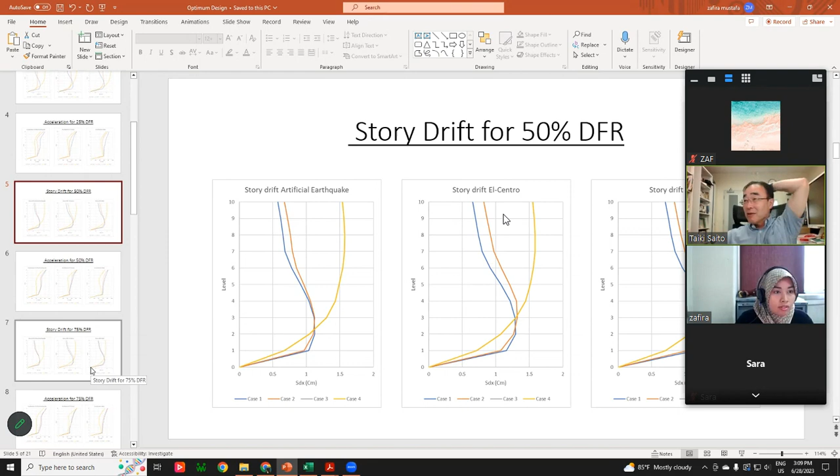I would like to explain a little for people who don't know the background. So there are 4 cases. We are analyzing the building coupling beam.

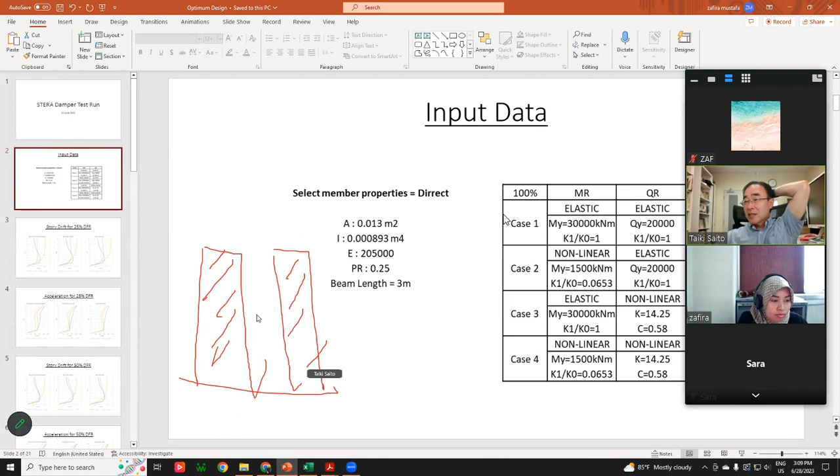So this is a coupling wall. Okay, this is a wall, and between them there are coupling beams. So the first case is the coupling beam actually has a bending spring appended and a shear spring in the middle. So this is a coupling beam.

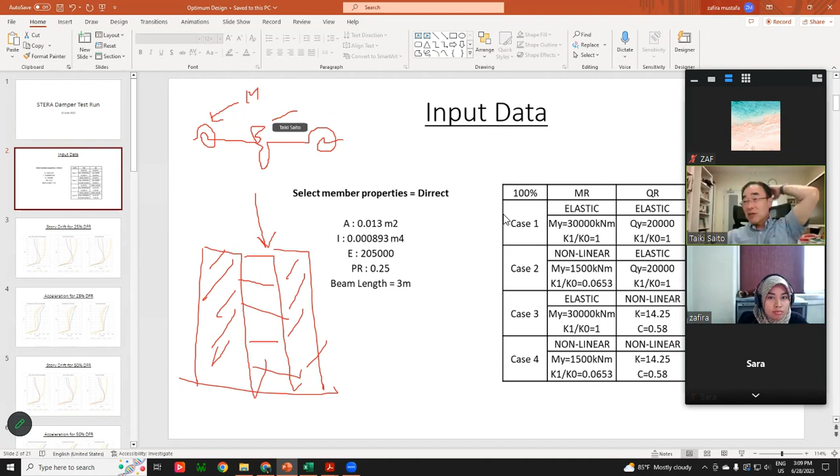This one we assume over yielding of steel, so we call it metallic damper. So this is the metallic damper. And this one we assume to be viscoelastic. So this is shear force, this one is moment, and Q is shear force and rotation.

And the first one, we assume elastic, so yielding of the two springs is intentionally made very large. Maybe you should put the kilonewton unit here.

Right. And the second case, we assume yielding for the metallic damper. Actually, the metallic damper yielding at both ends, we assume, is equivalent to a metallic damper in the middle.

Right? Because the shear force and the moment are related to each other. So anyway, this is a bending spring, assumed yielding.

So 1,500 - how much percent is this for? This is 100%. The Q is 1,000 kilonewton, times 1.5 meter. So this is the case of 100%. Yes.

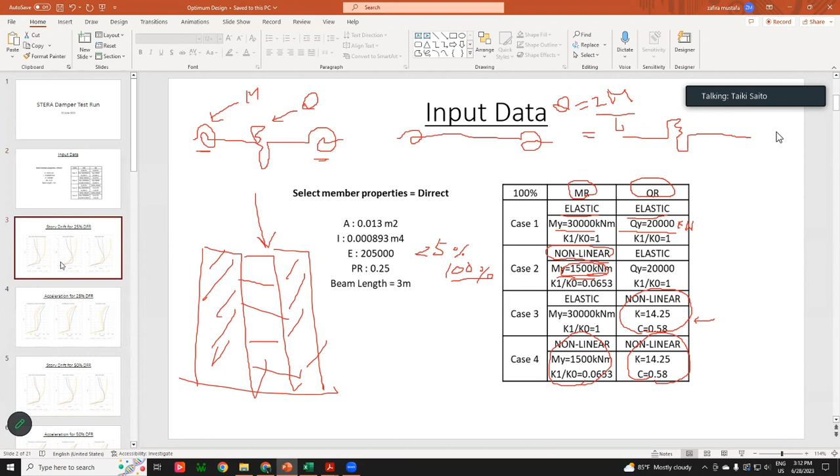And the last one is a combination of two dampers. Yes, okay. Could you go to the next slide? So in this case, 25% for which one? Okay, both of them, Sensei.

So the blue one is case 1, and the orange one is case 2. Then case 3 and case 4. Case 3 we have metallic and viscoelastic, but the metallic is elastic. For case 4 we have metallic and visco. So the story drift is the same for case 3 and case 4.

Okay, so case 3 is viscoelastic and metallic. Only viscoelastic, yes, because the metallic damper doesn't yield for case 3. No, case 4 - it doesn't yield, so the result is the same. Okay.

Case 1 is elastic, yes. Elastic looks like small deformation, but it's over 1 centimeter. And case 2 looks very good. So case 2 is the metallic damper.

And how high is it? 10 stories, Sensei? No, story height, inter-story height. The inter-story height is 3.2, the total is 32 meters. 3.2, yes.

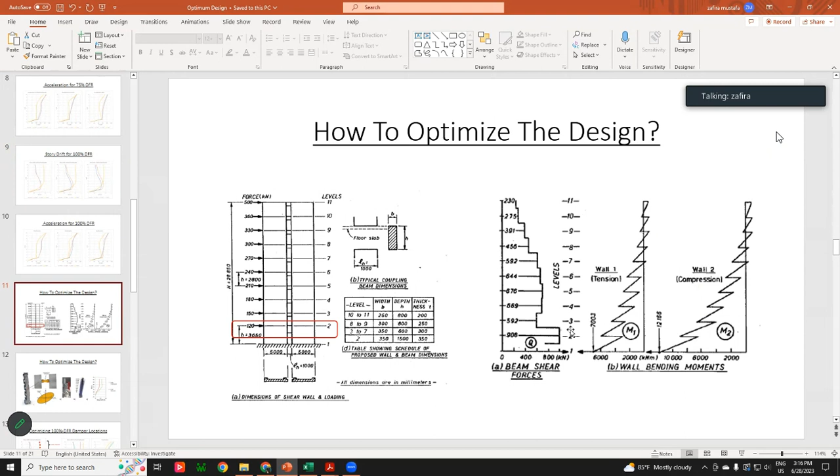Yes. Okay, and then I tried to optimize the locations of the damper, because here, for example at 100%, the location of the damper is from level 1 until level 10. Okay, and then from a few papers, we know that the bottom has a large shear force, and also at the top it doesn't actually displace much. It doesn't need a damper at the top and the bottom.

So what I did is I replaced the bottom from level 1 until level 4 with metallic or steel beam, and also at level 8 until level 10 with steel beam. For in between, level 5 to 7, I used viscoelastic plus metallic damper. After that, the story drift can be reduced to less than the limit.

And if you can see the gray lines inside, the gray line is from the steel beam. So if we have a stiff beam at the bottom, we can reduce it at the bottom. And also at the top, we don't need a lot of rotation, so we can just replace it with steel beam instead of using metallic damper and viscoelastic.

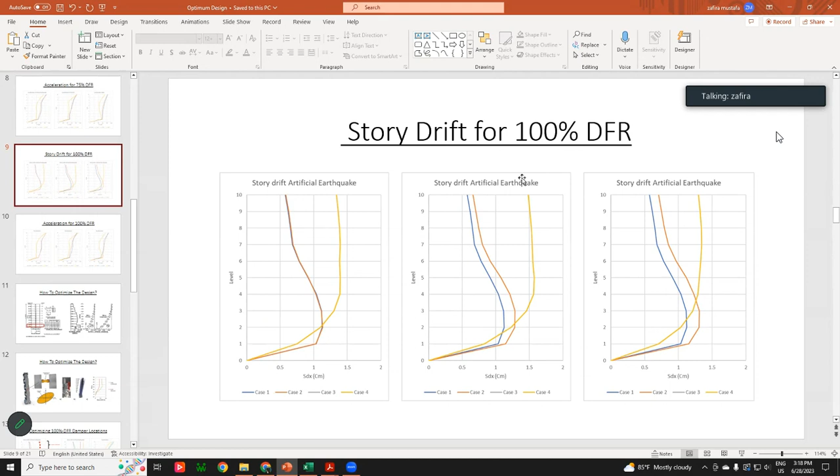Sorry, I understand. If we can see from the previous result, all the metallic damper and viscoelastic here have a larger story drift. Even though the percentage is increasing, it still exceeded the limit. So what I did is I tried to optimize the location of the metallic damper.

Not every story has metallic and viscoelastic, only at level 5, 6, and 7. Others are using steel beam.

Would you show me the deformation of the coupling beam along the height? Okay, you are just plotting story. This is the deformation for viscoelastic, for the damper, this one at level 5, level 6, and level 7.

What is the level, what does it mean? Story? Level 5, level 6, and level 7. You mean the story? Yeah, the story height. Not story height, so...

If I can position the damper in the middle, only the middle story, I can reduce the story drift. Also this for El Centro, and this one is for Kobe. So only the El Centro has a bigger story drift.

So what I did is I replaced the bottom beam with a bigger size, so I increased the stiffness of the steel beam, so I can reduce the inter-story drift. And this is the hysteresis figure from the damper at level 5, 6, and 7.

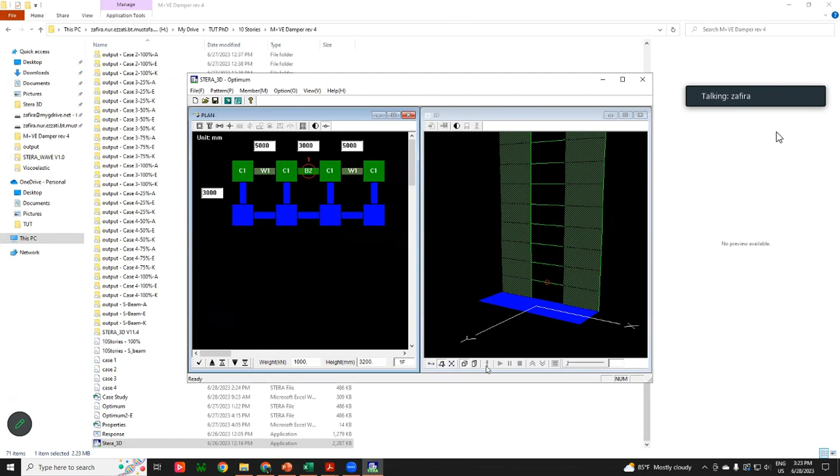So let's go to level 1. This is the steel beam. Could you show me the property of a beam?

Okay, B2, could you click? This is from the data beam. So this is 100%, data beam for metallic. Yes, 100%, 100%.

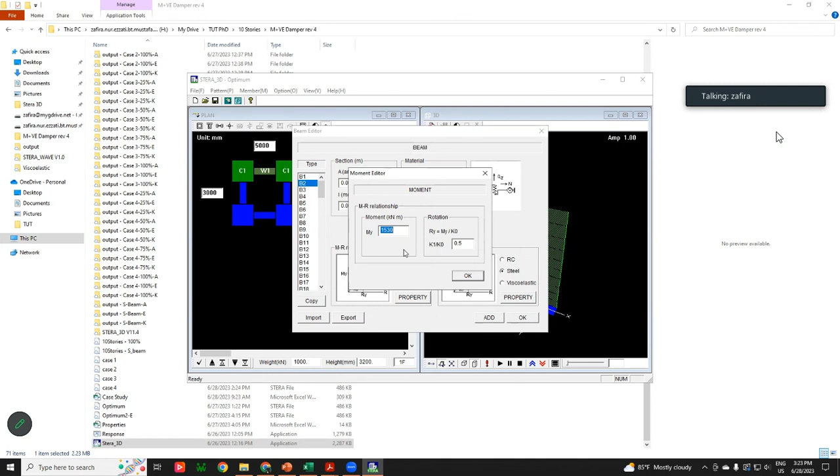Okay, and then for example, so it's elastic, so no energy dissipation. Only in the one with damper sensing.

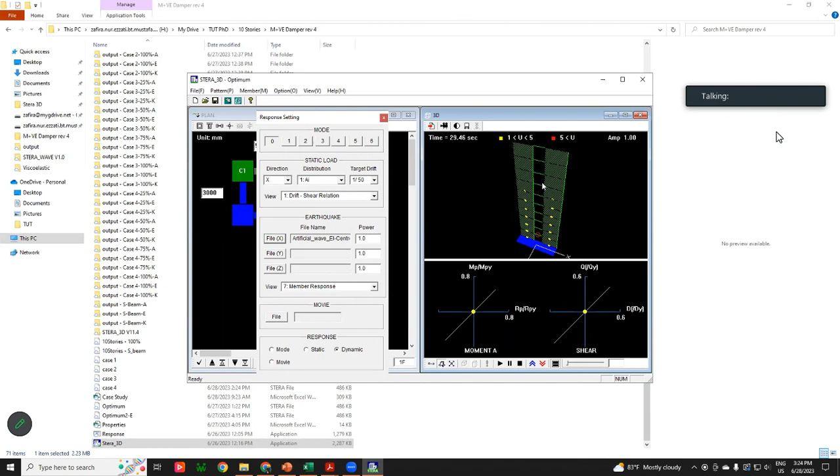The acceleration for the optimum case, it is even larger than before. Yeah, so it's not good. You can reduce deformation, but you increase acceleration, because it's too stiff.

Last time I asked you to, so I was thinking to combine two dampers, right? Yes. And back to, for example, 25%. 25%. This one?

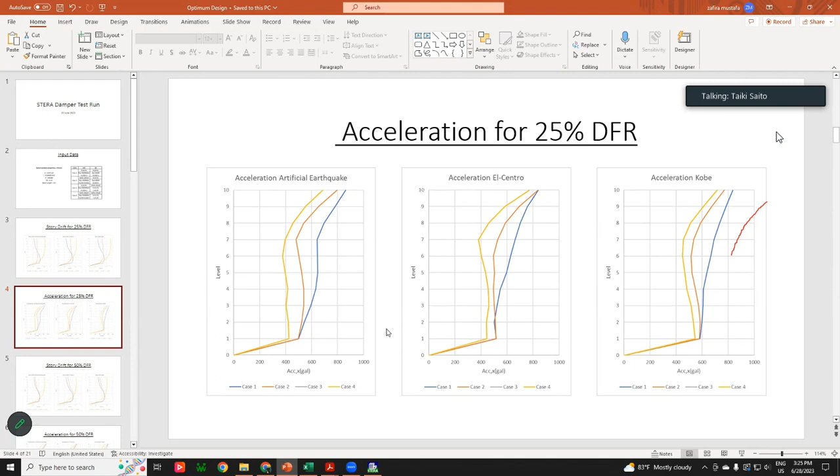Okay, oh, and let's see. Acceleration for 25%. No, not acceleration, the story drift. The story drift.

Okay, so this is a viscoelastic damper plus metallic damper. No, it is viscoelastic, case 3 and 4. No? Yeah, viscoelastic, viscoelastic. Okay, right? So this is viscoelastic.

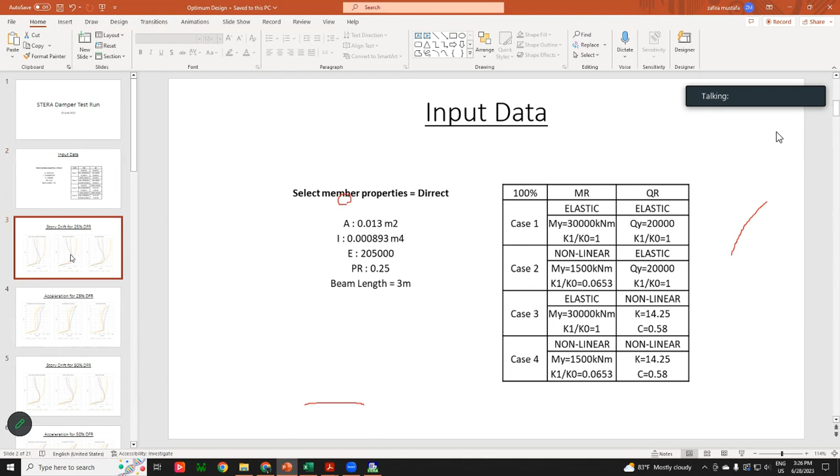Well, I just want to say, right, to V. Okay? V, and this is metallic. So it looks like metallic, it's very good, because it's less than 1 centimeter.

Okay, so viscoelastic is more than 1.5 centimeter, so you want to reduce it. Okay? And case 3 and 4, same result, because the metallic damper doesn't yield.

Okay, so case 4, so it must be metallic damper plus viscoelastic damper, case 4. Yes. But the metallic damper is not yielding, so it is the same as case 3.

So I suggest to reduce the strength of the metallic damper, so that both dampers yield, I mean both dissipate energy. And did you try? Yes, I tried. But the ductility, when the metallic damper is very small, the metallic damper broke.

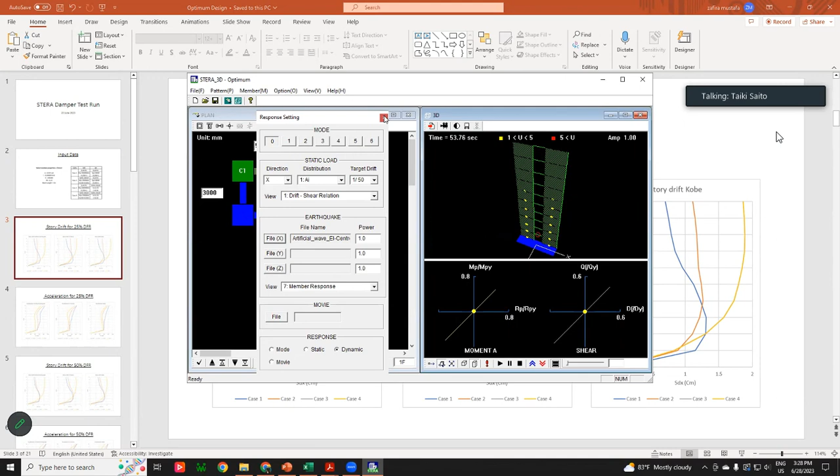And for example, let me try here. No. Case 4.

Okay, and then so we have steel and viscoelastic. Yeah, and properties.

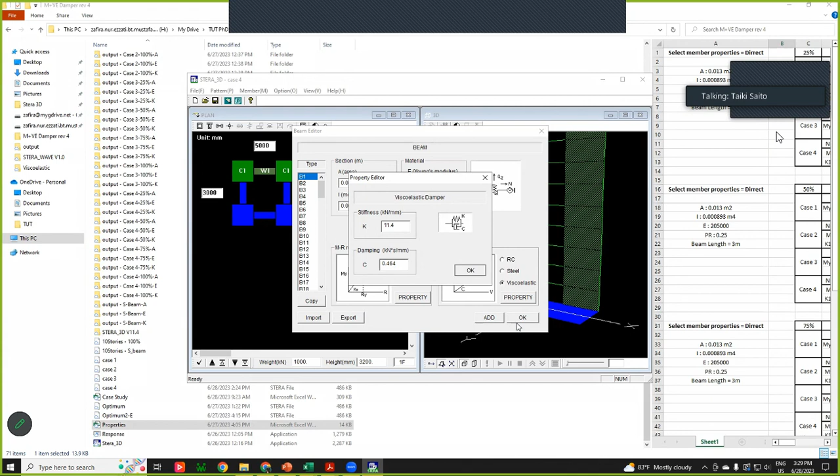For example, for metallic, we take the small number, 25%. So 25%, okay. 25% is 375 kilonewton meter. And then this viscoelastic, the largest one, let's say we can take 50%, and take 11.4 and 0.464. This is 50% viscoelastic. Okay.

Then, could you check level 1? Okay, yeah.

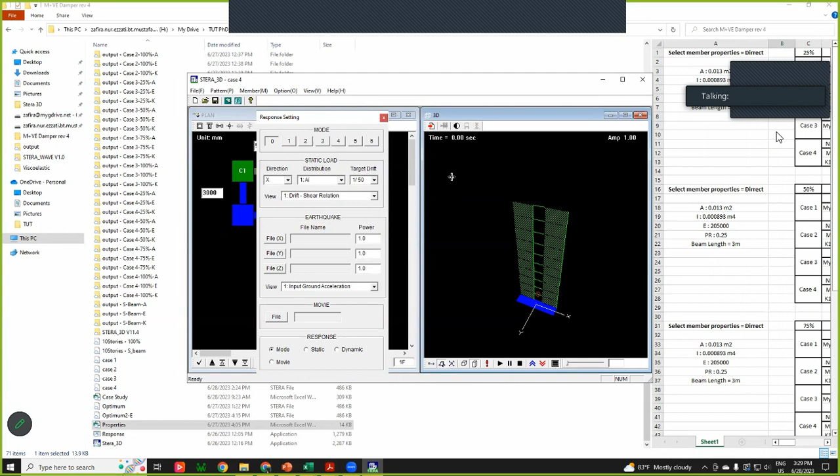Okay, so it starts yielding a little bit. Yes, but it doesn't go in a circle. It's like going... it's a bit weird. Oh, it's very weird.

And also the viscoelastic deforms very weird. So weird. Something seems off. Really?

Something really seems off. Could you check the option analysis? Okay, options, analysis, dynamic, is that? It's 20.

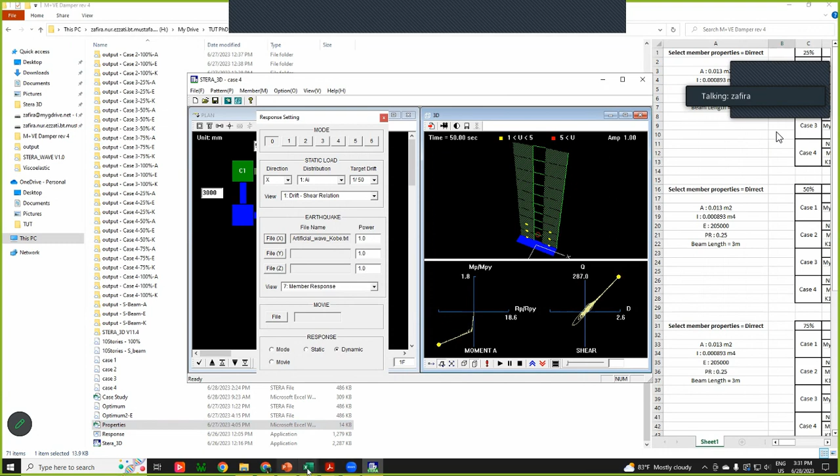And because Sensei, previous research also says that the viscoelastic damper doesn't have to go along the whole height, usually it's only put in the middle stories. So that's why I just tried the theory for the model.

Oh, really? In real examples, they put it only in the middle story? Yes. Are you sure? Yeah, this is from the Toronto project, so they put it from here to here. Yes, I can see, there is a yellow part. And that's... okay.

Yeah, because they want to reduce the higher mode, second mode maybe. But your building is only 10 stories.

Next step, Sensei, maybe Sarah-san can try 15 stories. I'll try 20 stories, I'll try it and we can compare the result. But...

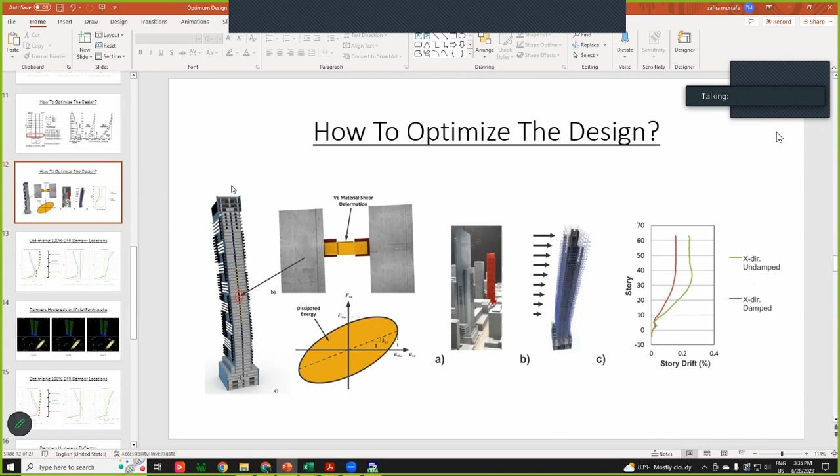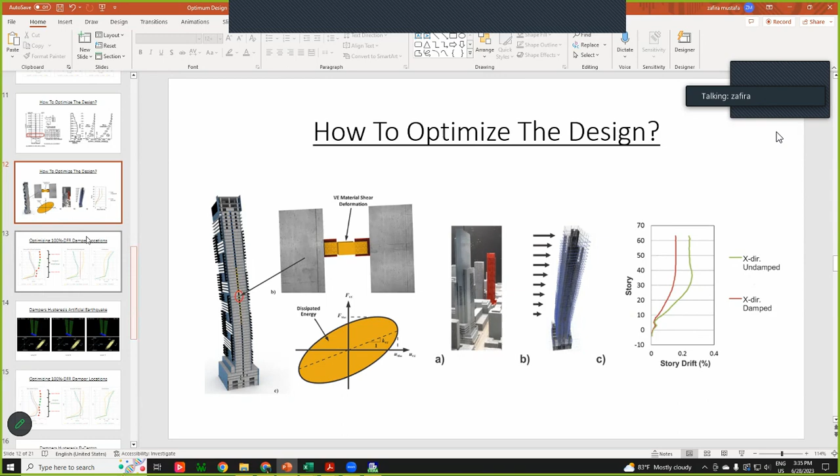I want to check shear deformation of coupling beam, along the height. You mean you want this kind of beam shear force? This shear forces - I want to see the shear deformation along the height.

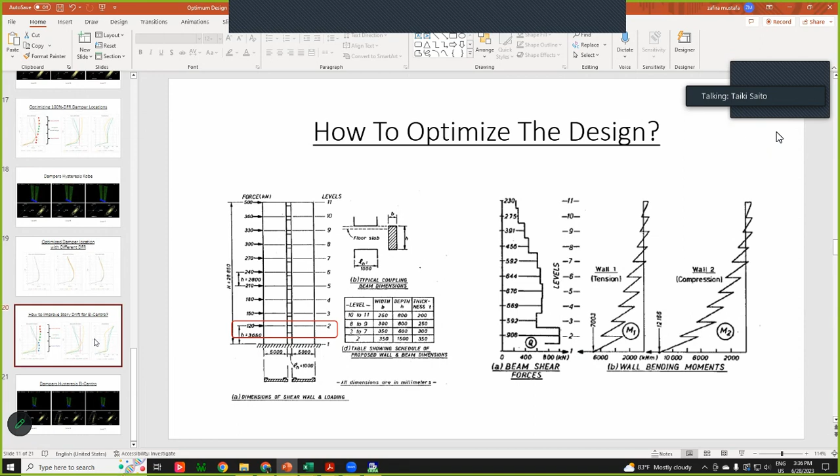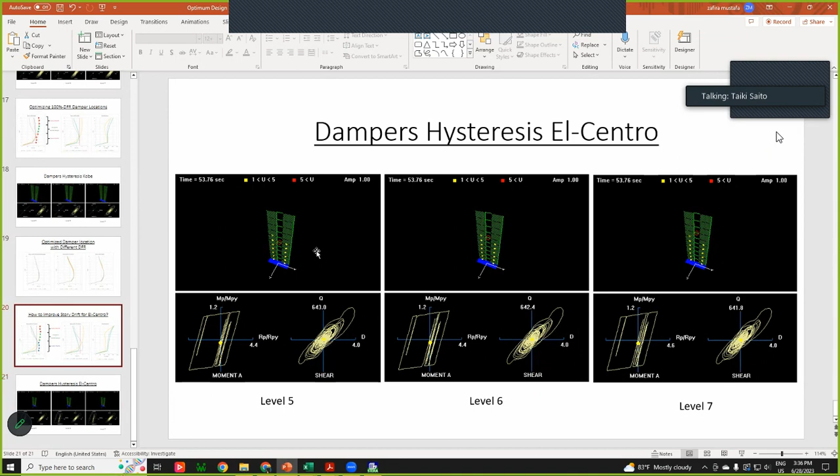It's not good if you have yielding of metallic damper and viscous damper together - the response is strange. You mean in the STERA 3D? Yeah, this one is strange, something wrong. This one is only metallic damper? No sensei, this one is viscoelastic plus metallic together. But which level are you plotting? 5, 6, 7. So you have both spring.

Another thing I forgot to mention - since after optimization, I tried different percentages from 25 to 100. It doesn't have much difference. Change, I mean, 25% of what? Viscoelastic and metallic, the force ratio.

Why? Maybe it's just 3 levels of damper, that's why it doesn't change so much. Could you go back? And you put the viscoelastic damper for only middle story, level 5, 6, 7. Maybe that's why the story doesn't change so much.

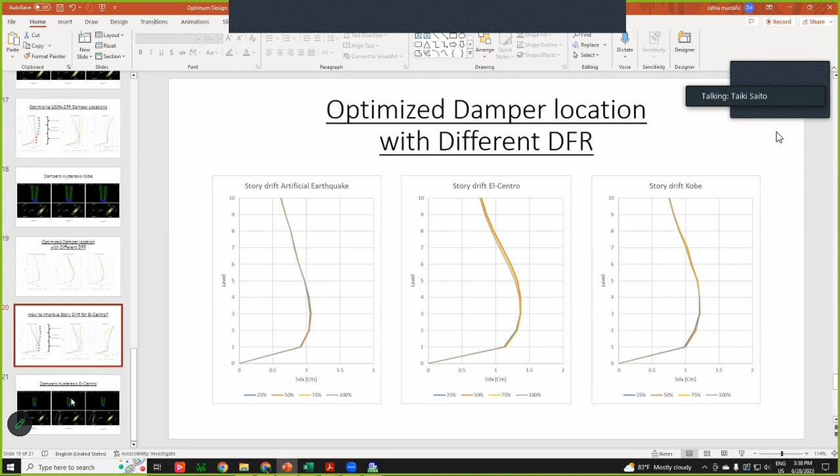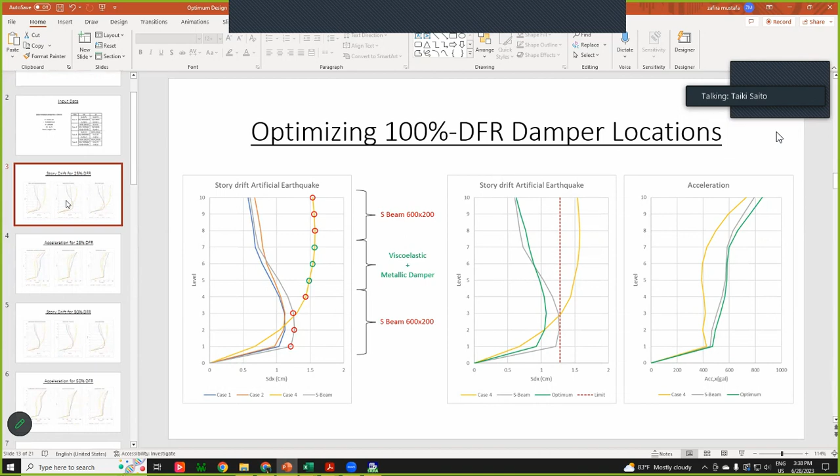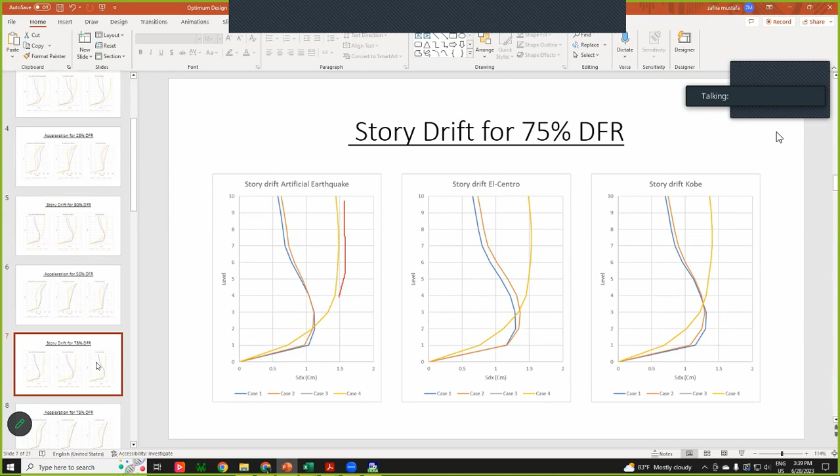Could you go back to your slide, from the beginning? This is 25%. So this is only viscoelastic, right? Yes, case 3. Could you show me 50%? It doesn't change much. How about 75? Almost - this is 100.

Could you go back to 25% again? So this is elastic. Yes, it's elastic.

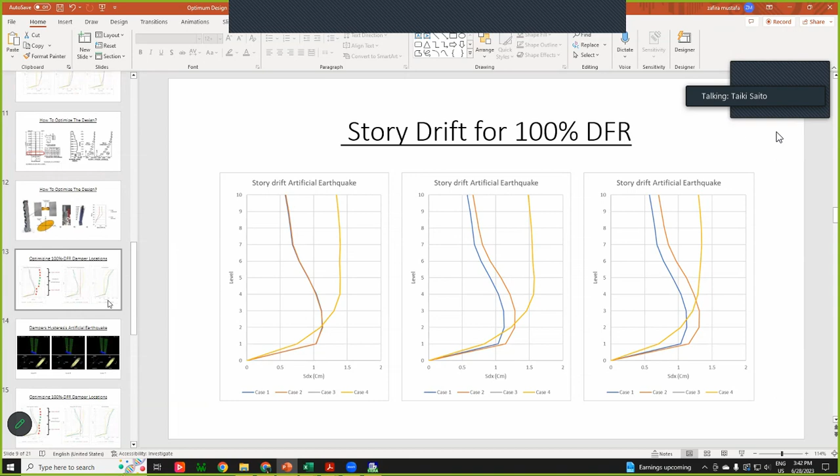Yeah, I understand. Well, optimum damper location - the idea is interesting. You need some theory. Yeah, I'm looking for it.

Or you make some different cases. One case is you put the same damper at all levels, one case is you arrange viscoelastic damper only at middle story like this. Another might be viscoelastic damper top and bottom and middle story metallic damper, for example. So you can compare the results.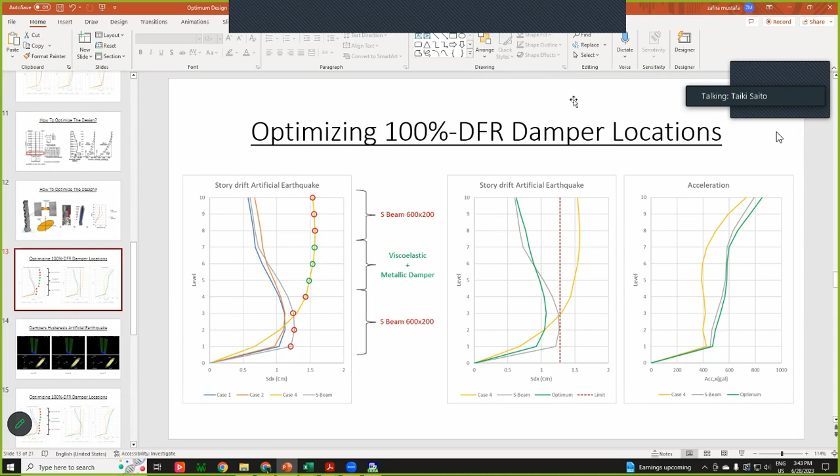You must write a paper for JCAS. When is the deadline? August - you still have 1 month. Okay, let's discuss more. Send me the file again, I will check. Thank you, but it's getting interesting.

We must start discussion about displacement-based design. Our target story drift is 1/150. But maybe we should also discuss reducing acceleration. From your result, you can succeed in reducing displacement, but on the other hand you increase acceleration. So what is the acceleration? Story drift is 1/100, 1/200.

So we must consider some kind of criteria for acceleration.

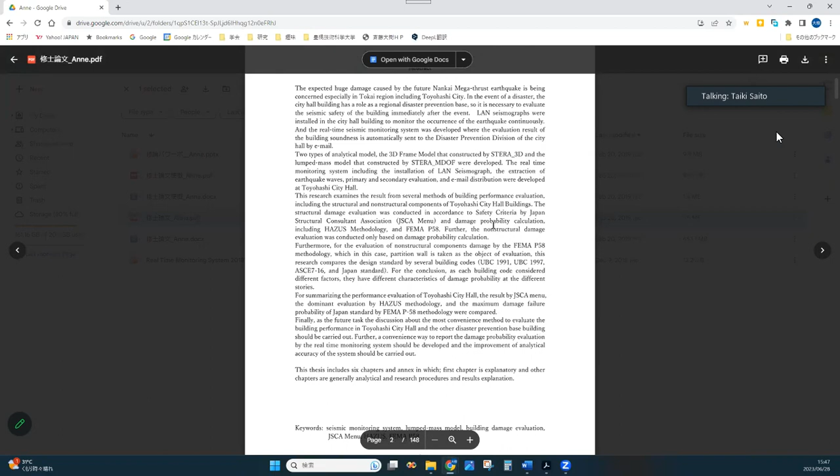I remember she discussed the response criteria, both for drift and acceleration. Let me check, I will share my screen. So in Anne, I will show you her master thesis - it's a real-time seismic monitoring evaluation system. And in the paper, there is a kind of criteria.

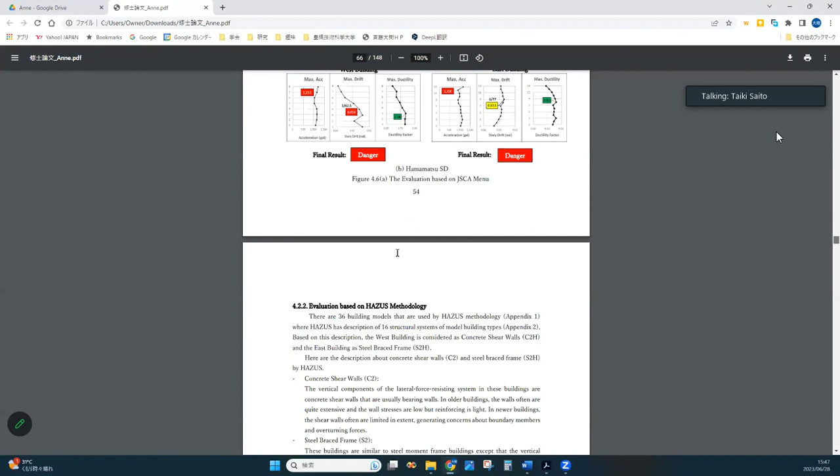So in this case it's a moment resisting frame, no shear wall. So story drift of 1/100 is a kind of yielding criteria, but the danger level is 1/75, and 1/150 maybe is a criteria - less than this we can say safe. 250 gal, maybe less than 250 we can say safe. But if it reaches 500, we will say warning. And 1000 gal we can say danger. Maybe we can use this acceleration criteria.

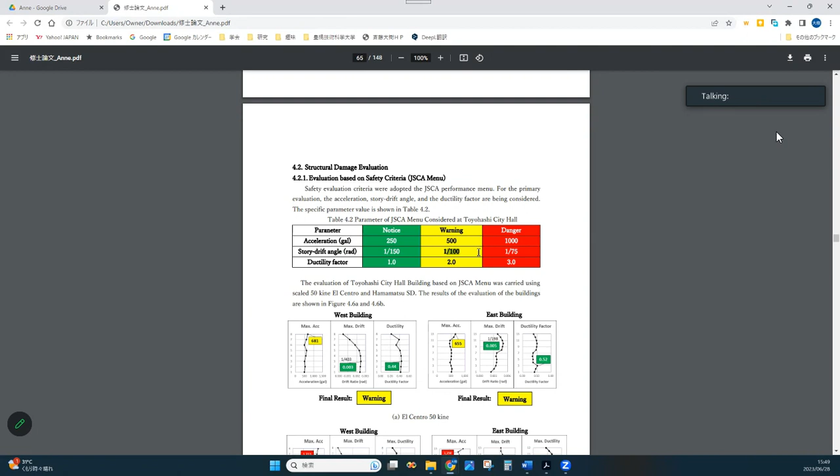And this is not her original - it is from Japan structural, what is the abbreviation? JSCA, Japan Structural Consultants Association or something like this. But they present this, so maybe you can use this criteria for acceleration. But for story drift, we have a shear wall, so I recommend warning might be 1/150, 1/250 instead. Okay, thank you so much.

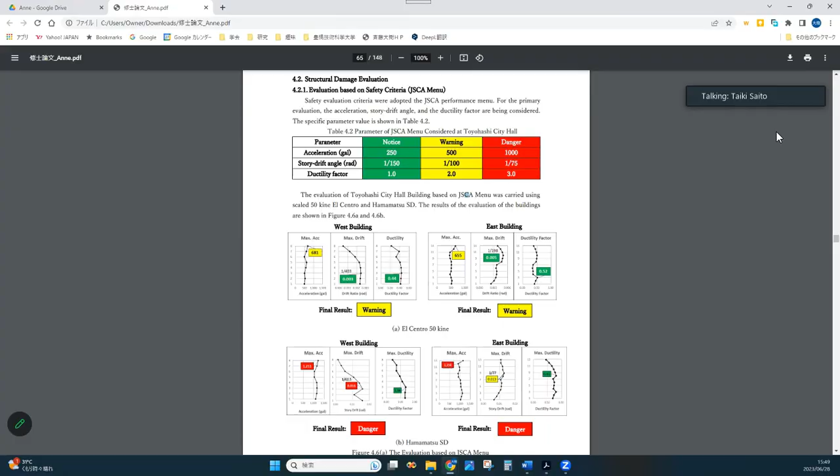Oh, Sara-san? Yes. Sara-san, I cannot hear your voice.

Okay, now I'm going to talk about experimental validation of viscoelastic coupling in terms of the enhanced dynamic performance of high-rise buildings. It was written by Michael Montgomery and Constantin Christopoulos. First, introduction.

This paper describes an extensive experimental program carried out on a small-scale viscoelastic damper at the University of Toronto structure testing facilities, for achieving enhanced dynamic wind and earthquake performance of high-rise buildings. This paper proposes a small-scale viscoelastic test to characterize the viscoelastic material for realistic loading conditions of high-rise buildings, for the range of strain and frequencies.

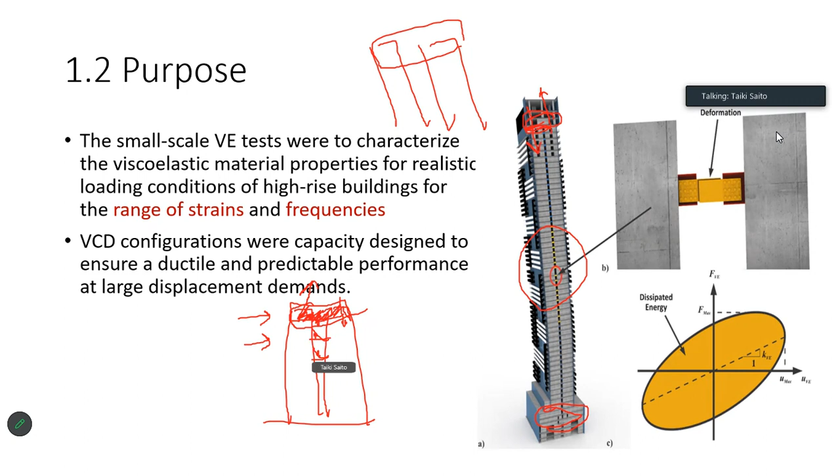No. Usually we put separate coupling walls. Otherwise, the advantage is: when an earthquake happens with horizontal load, this part goes up and this part goes down, so we can expect a big deformation in the coupling beams, and we can use this big deformation to dissipate energy. But if you combine them together at the top story, somehow you reduce this advantage. I don't know why they put two walls together and connect them. I don't know. Because it's a very high-rise building, maybe they don't like a big difference left and right. But your building is only 10 stories, so if you connect the top, there's almost zero deformation in the coupling beam. Understand, okay.

Please continue. Okay, viscoelastic damper configurations were capacity-designed to ensure ductile and predictable performance at large displacement demands.

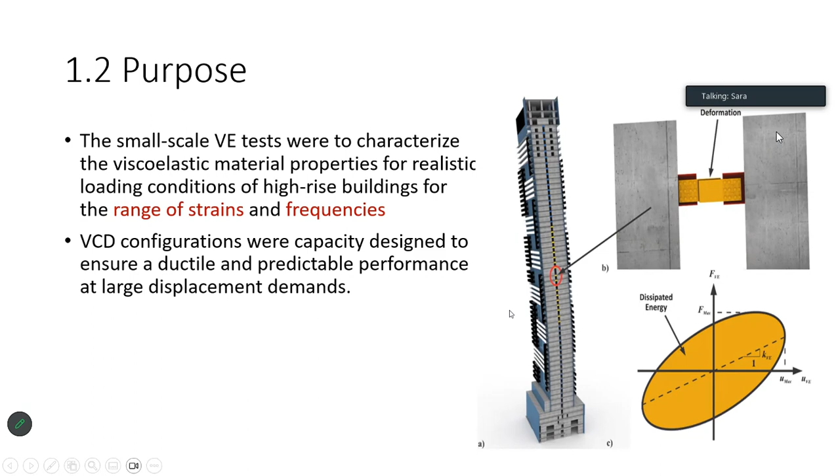Next is the intended performance of viscoelastic dampers for wind and earthquake loading. It's designed to provide performance improvements over the overall ranges of wind and earthquake loading. For static wind loading, the viscoelastic frequency dependency must be considered, as the static stiffness of the viscoelastic material is significantly lower than dynamic stiffness. For seismic loading above that, the strain amplitudes are larger than wind loading, and the duration period is shorter than wind loading. It's characterized by the fundamentals of vibration plus the contribution of higher modes of vibration, which are at higher frequencies, but the deformation amplitudes are lower.

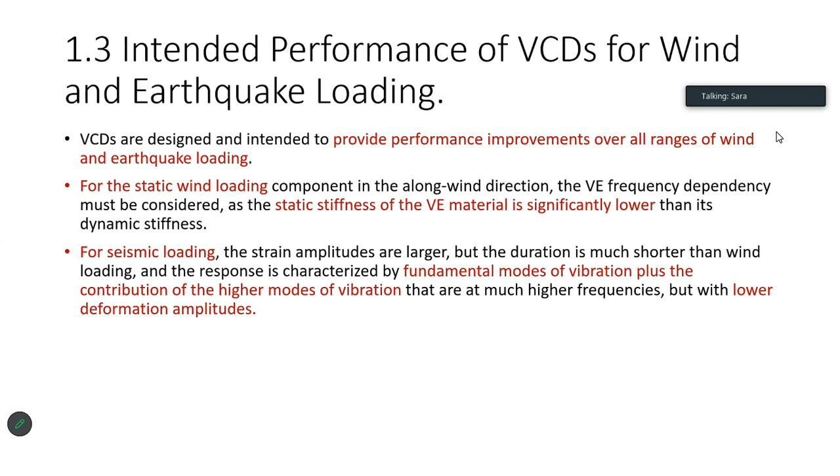For this, during extreme seismic loading, a ductile force-limiting fuse mechanism is introduced in series with the viscoelastic material, such that the fuse activates to limit forces transferred to the concrete wall, and to prevent tearing of the viscoelastic material. Through careful fuse detailing, and if needed, the inclusion of a lock-up mechanism, it is possible to achieve substantial shear deformation as a combination of viscoelastic material deformation and fuse element plastic deformation.

After an extreme earthquake, if necessary, the damper can easily be inspected and repaired, or easily replaced.

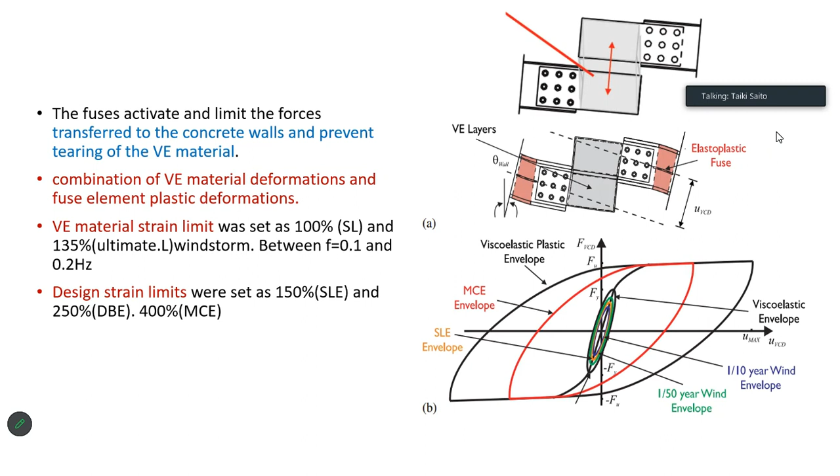Okay, Sara-san, please continue. So it is the viscoelastic damper test scope and the overall.

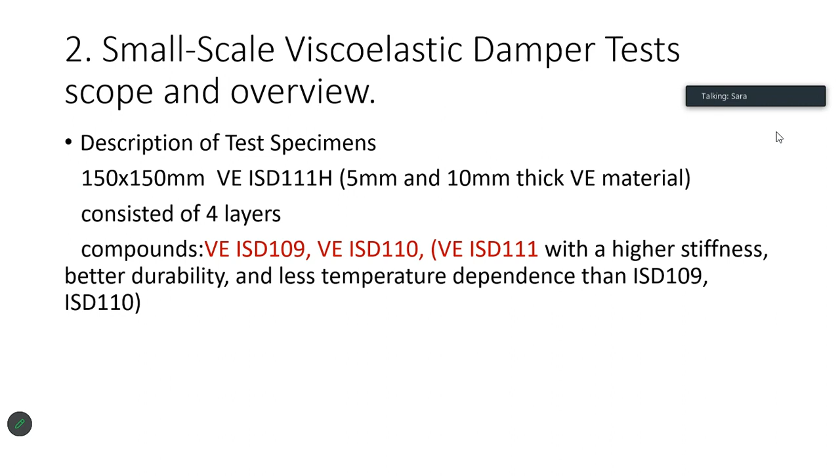This is a description of the test specimen. The dampers consist of 4 layers of 150 millimeter viscoelastic ISD 111H, with 5 millimeter and 10 millimeter thick viscoelastic material. Extensive test data is available for ISD 109, ISD 110, and ISD 111 compounds. ISD 111 has higher stiffness and better durability and less temperature dependency than the previous compounds.

So you cannot control it by 75 or 50. So if this is 100%, it should be 80%, 60, 40, and 20% maybe. Is that correct? Actually, I just use 100, 75, 50, 25. But the number is 5, 4, 3, 2, 1, like I think it's rounded up. But you use the same material, right? Yes, just changing the number of layers. So if you use the same layer, 5 layers is 100%, 4 layers is 80%, right? It cannot be 75. Okay, Sensei. Yeah, thinking about the real arrangement of this material.

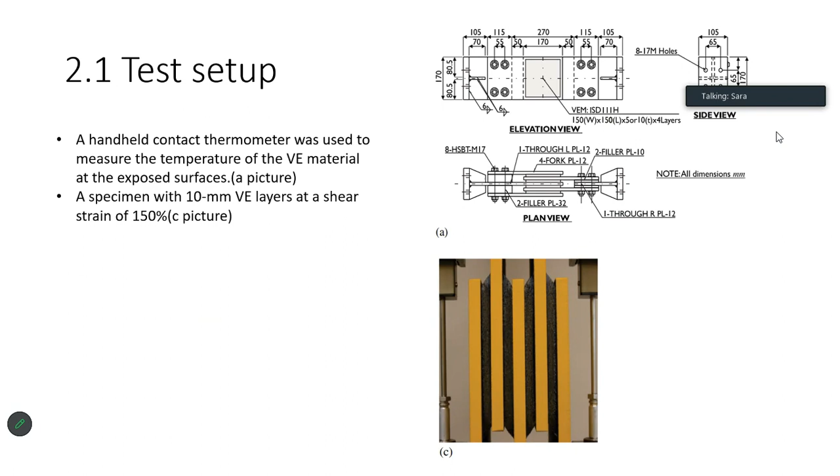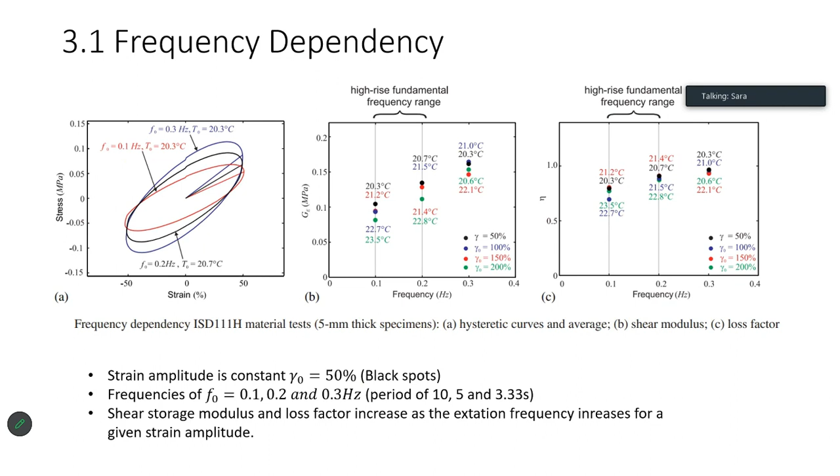And the shear storage modulus marginally decreases with increasing strain amplitude. The shear storage modulus decreases as strain amplitude increases, while the loss factor is not significantly dependent on the strain amplitude. Viscoelastic material properties can be considered strain-independent for a given temperature and frequency from this.

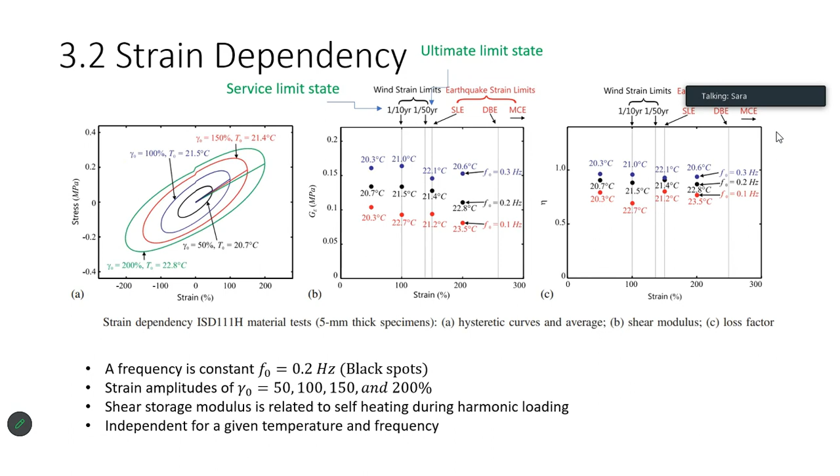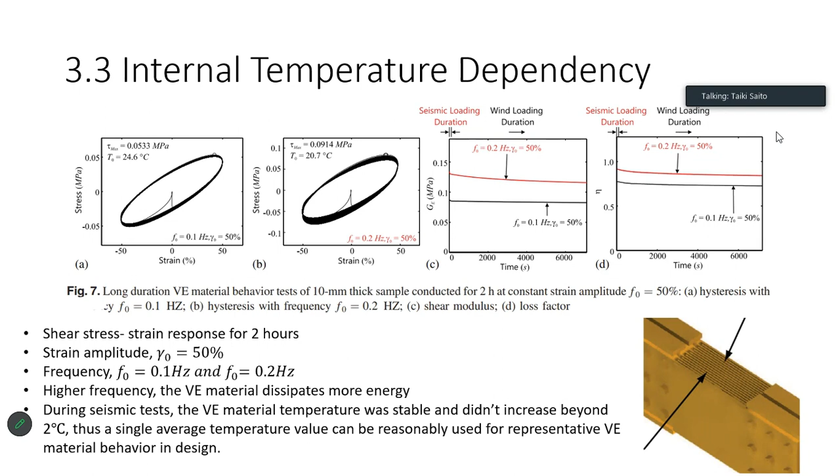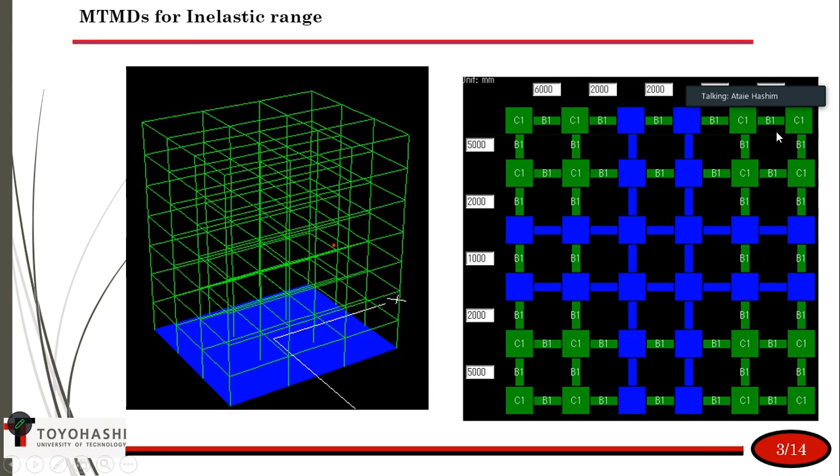Since I modeled this frame model like this, the y direction is 15 meters and the x direction is 18 meters, and it's 7 stories. I chose two types of columns - from 1st to 4th floor this is the properties, and from 5th to 7th this is the properties.

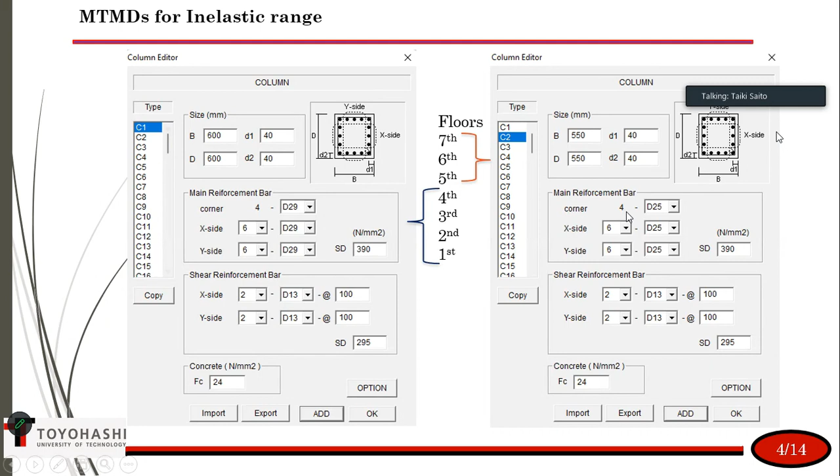After analysis of the TMD under 4 earthquakes, under El Centro just the 1st floor yielded. Why is the first floor yielding? Because it's not as strong, it will yield, sensei. Usually you design the building to yield at the beams - weak beam, strong column design.

But because the floors are rigid, 2D rigid, sensei. Otherwise rigid - do you assume 2D rigid or 3D? 2D rigid, sensei. Deformed - but it looks like the beam is not deformed. In 2D rigid, I don't know, maybe the beam doesn't work, I think - it doesn't deform, sensei.

Could you open Stera? You can run it on the screen. Okay, sensei.

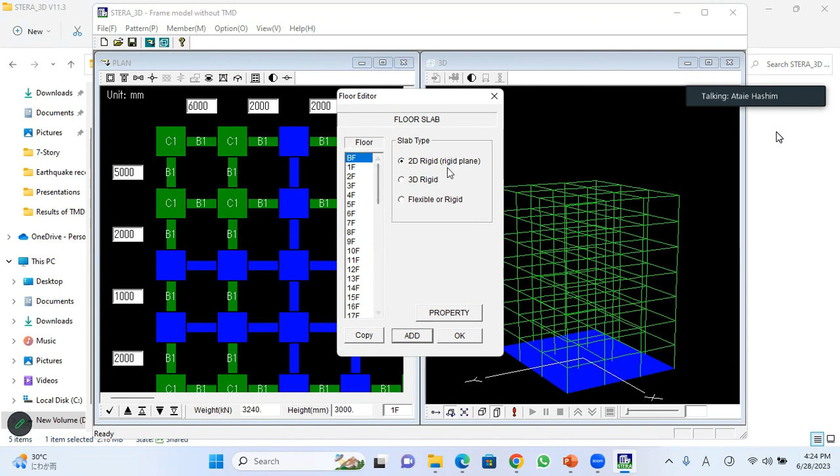Could you click option member? So mixed floor, okay. These floors are 2D rigid. Rigid, 2D rigid, yes, all of them, Sensei. There is no TMD right now. Okay, and could you push over this model?

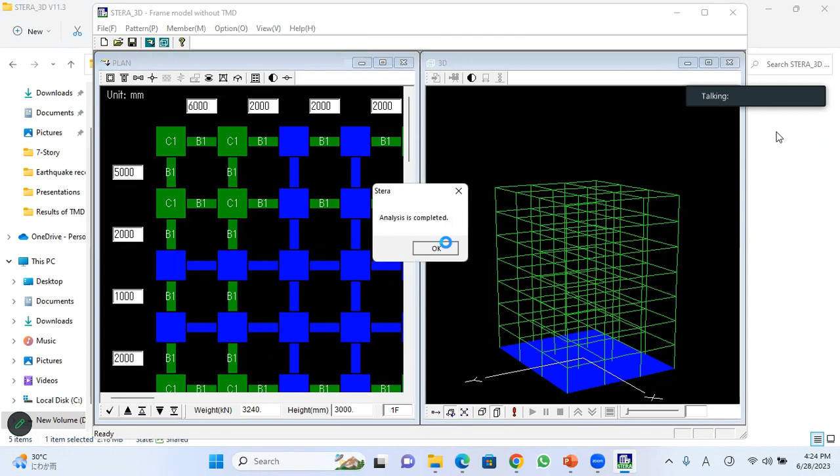No, don't put the capacity. Number 1 is okay. Okay, yeah. Strange.

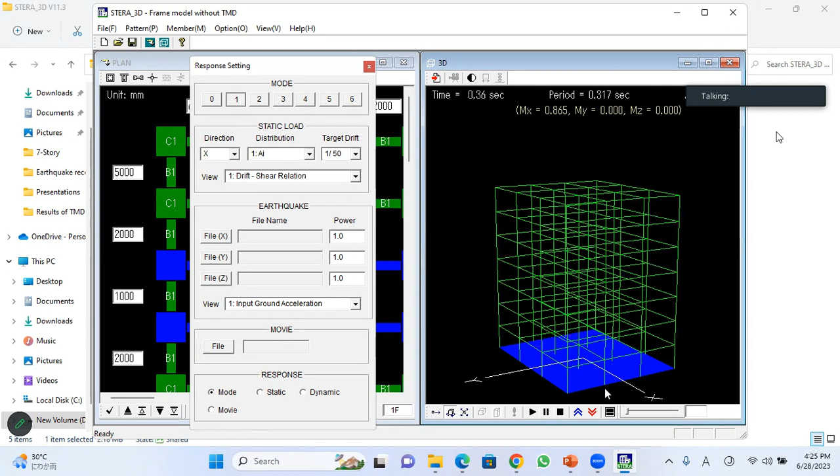How about the first mode? Mode 1, could you start moving? Could you amplify? It's not so. Okay, how about second mode? Okay, could you stop?

And show me option structure. What, Sensei? Option structure, option. Yeah. This, yes Sensei, you allow only one, only this direction. Yes, horizontal direction, yes, and no rotation. Yes, because I think it is...

So maybe it's unstable, but at first I didn't try to release all of them or 3 of them. Just I tried to work on one direction, Sensei. So how about 2, 4, 6, 7? X direction only. Could you do it now? 4, 6, 7, it is written here. 2, 4, 6, 7. Yes, not 2, 3, 8, it's 2, 4, 6, 7.

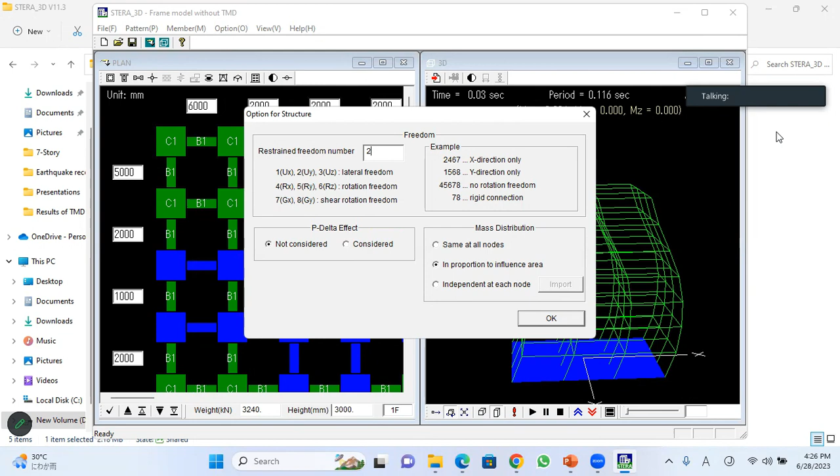Yeah, right, again. Push over. You don't need to touch, just the static and click start. No.

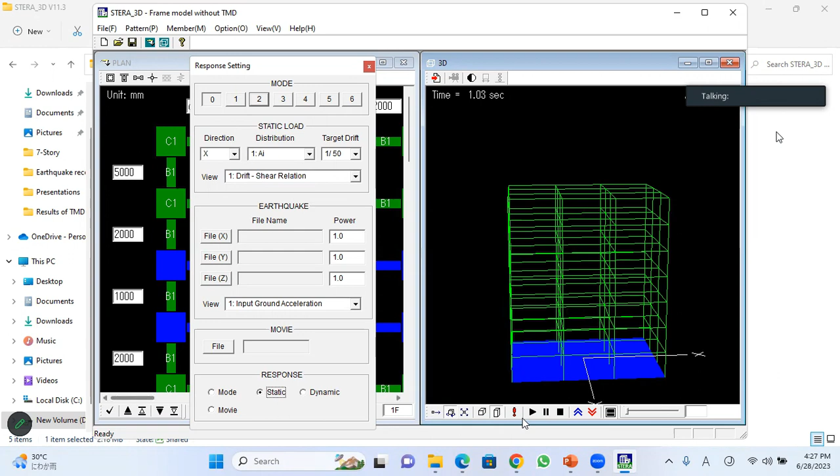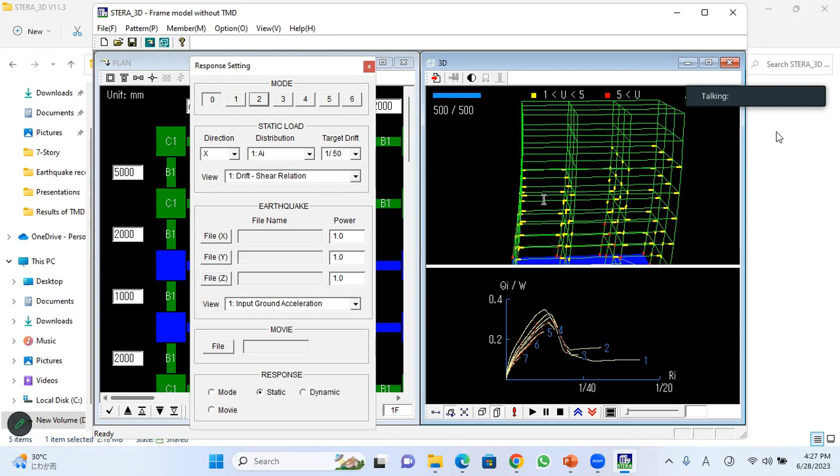Okay, it's working. Going down. Some column design is probably shear yielding happens in the column. Without TMD, Sensei, if we put TMD maybe it doesn't work. I don't know, just I remember that once I tried with Saranya-san.

I don't think so. So TMD, you put the rigid floor only for TMD? Yeah, this model is to install TMD, but the floor that TMD is installed on, that floor has to be flexible, otherwise the TMD doesn't work. Yeah, flexible, but you can put rigid, right? Yeah, other floors are all rigid, 2D rigid. I don't know. Do you have a model of building with TMD? Yes, Sensei.

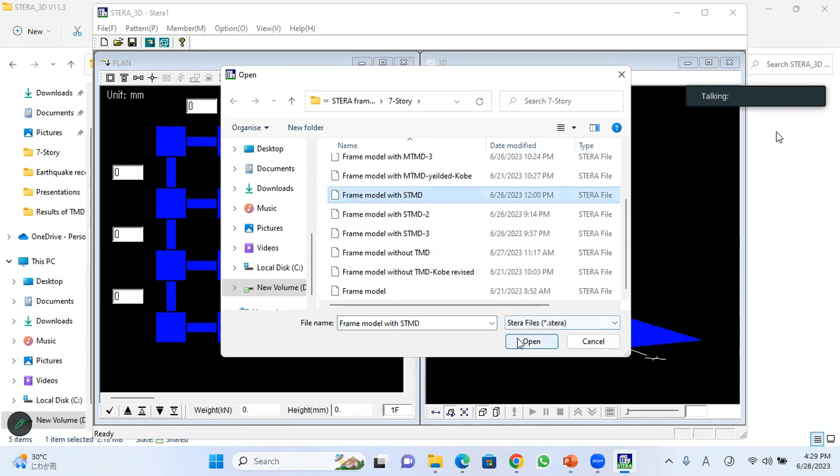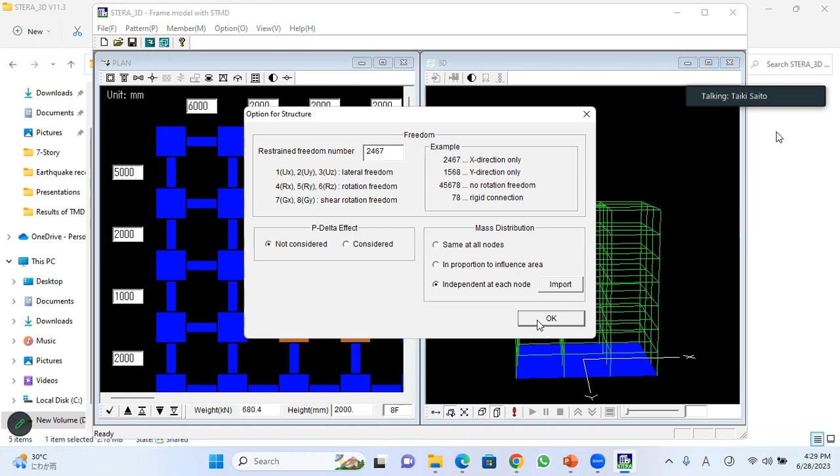You use this one, okay. Check option structure, and change 2, 4, 6, 7. Okay, and could you click floor? Yeah, and F1. The floors are 2D rigid. Okay, and I want to see the floor of TMD.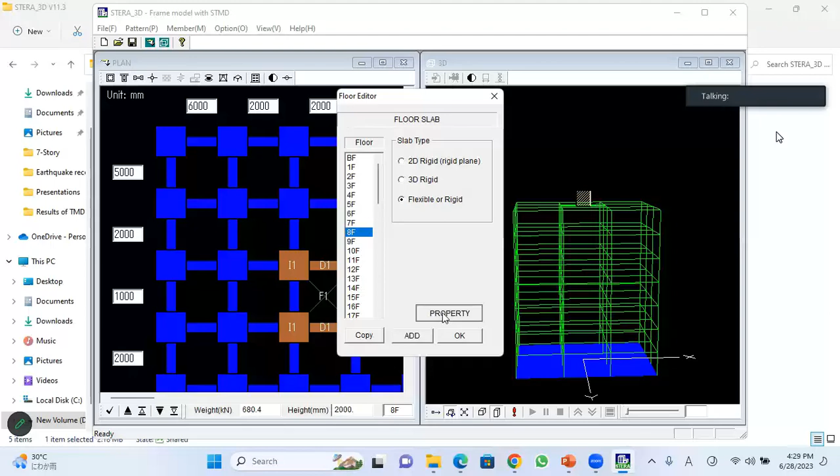This is flexible. Yeah, and could you... rigid? You use an old version. Use new version of STERA, it's 3D 11.4. Again, please download it. Okay, Sensei, latest one. Could you download it now?

Oh, it's a Japanese version. So could you? Okay, now... but no, it's still Japanese. 3DJ, it is Japanese, Sensei. So, could you automatically translate? Okay, it's okay, could you go down? Yeah, this is the one in English.

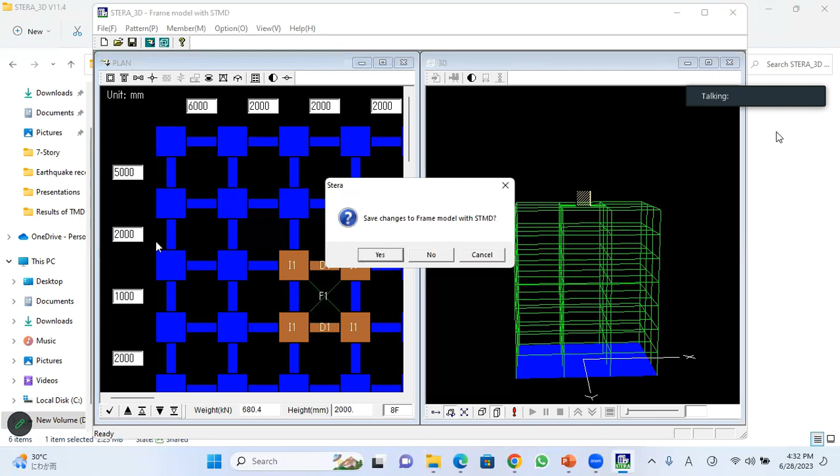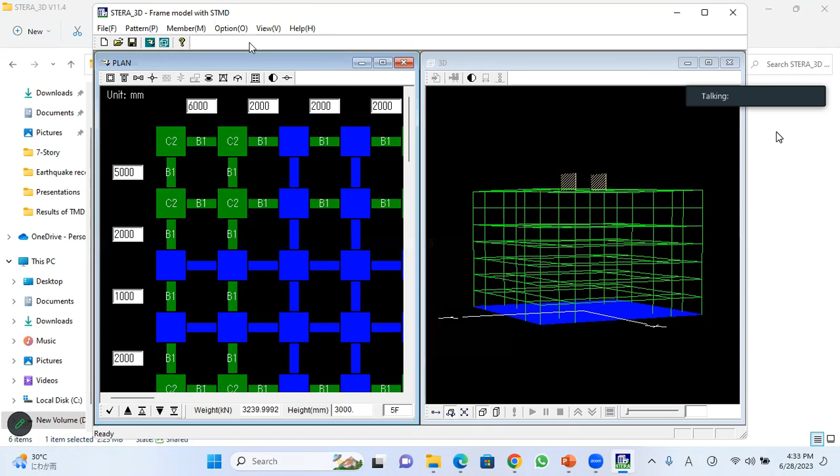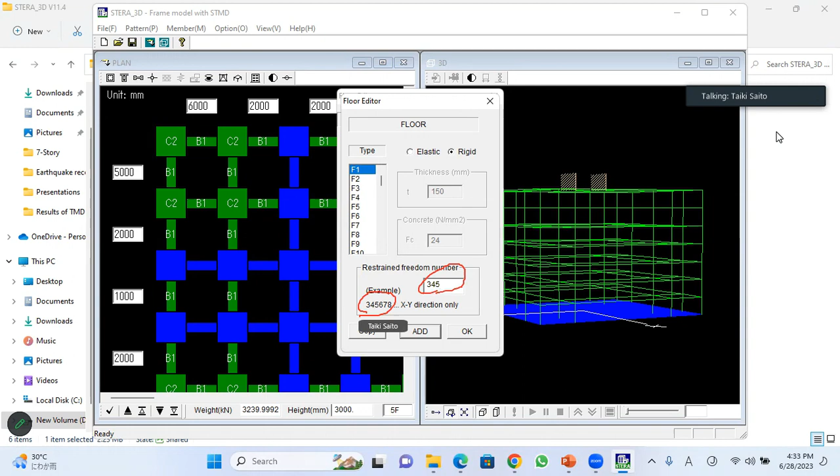Okay, could you click option structure? Okay, and please insert... no, use it, but only horizontal direction. So please put this number 3, 4, 5, 6, 7, 8. Yeah. Okay, now please try to run.

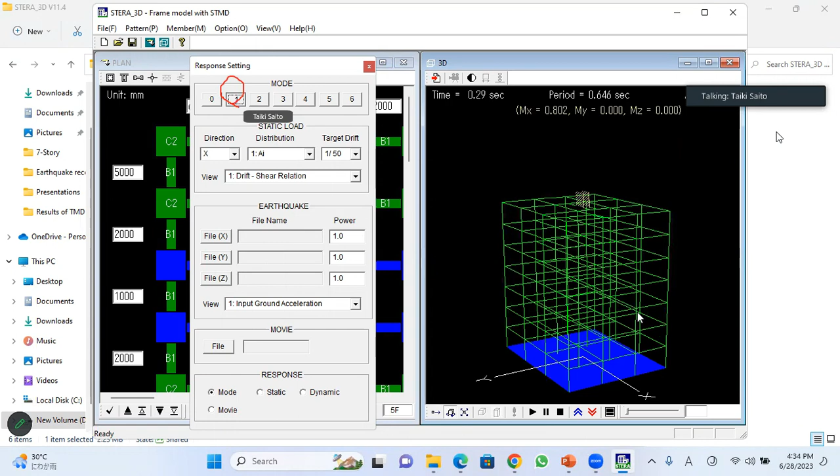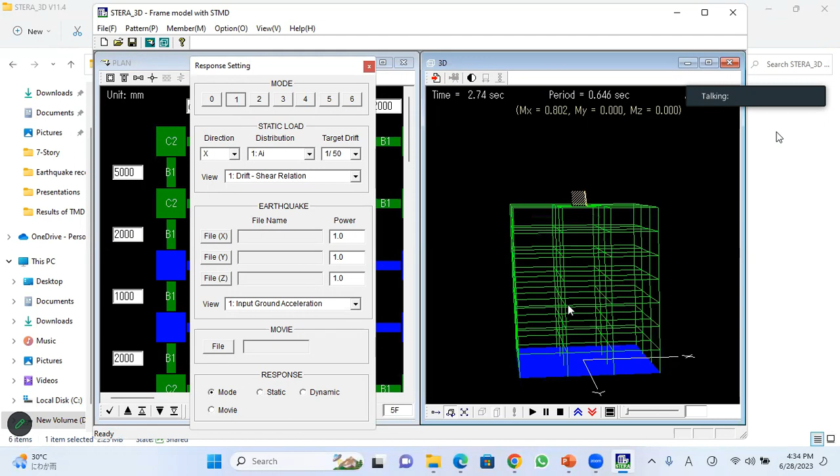Could you click first mode? TMD is moving, it's how about second mode? Second, okay, yeah, it looks working. Yeah, okay. For the first mode, it doesn't... no, it's moving together. Difficult to recognize. Yeah, but when you click second mode, sorry, I have control.

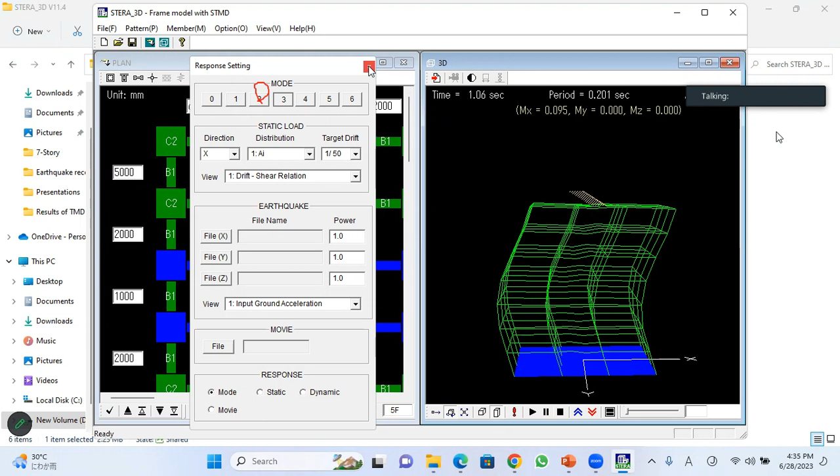Okay, could you... so is it okay now? Yes, Sensei, it's okay. Yeah. Solved. Yes, maybe I will check this, analyze based on this, Sensei. Yeah, but if it was wrong, the model that I analyzed before, I showed that all floors are rigid and just only the TMD. Yeah, so this model is not good.

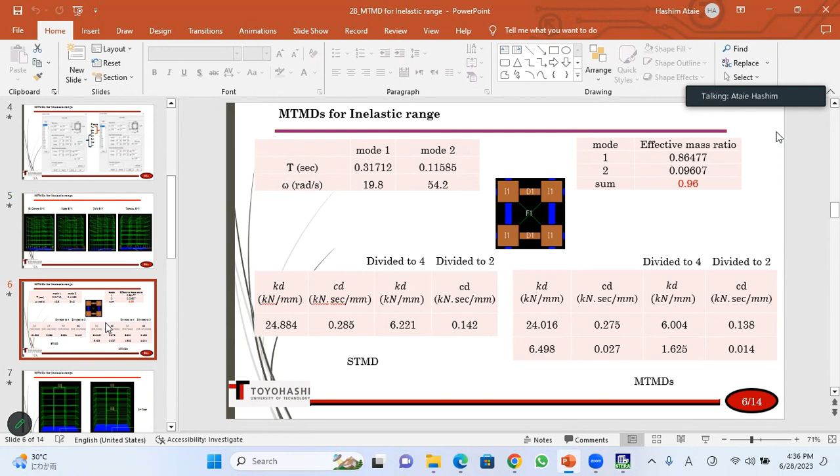Okay, so next time please show me again. Okay Sensei, but maybe I have a very quick summary of what I have done. This is based on the previous calculation, I calculated for single TMD and multiple TMD, which is 2, like this, Sensei. So it reduced the displacement, and for just Tohoku and Kobe, the first floor failed.

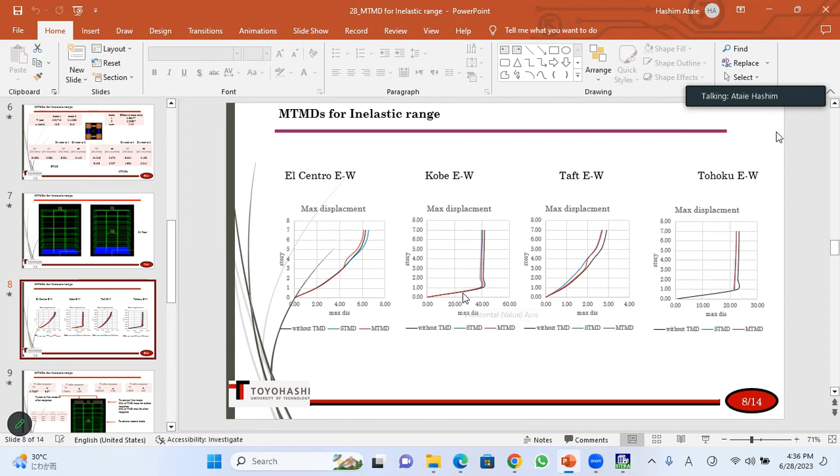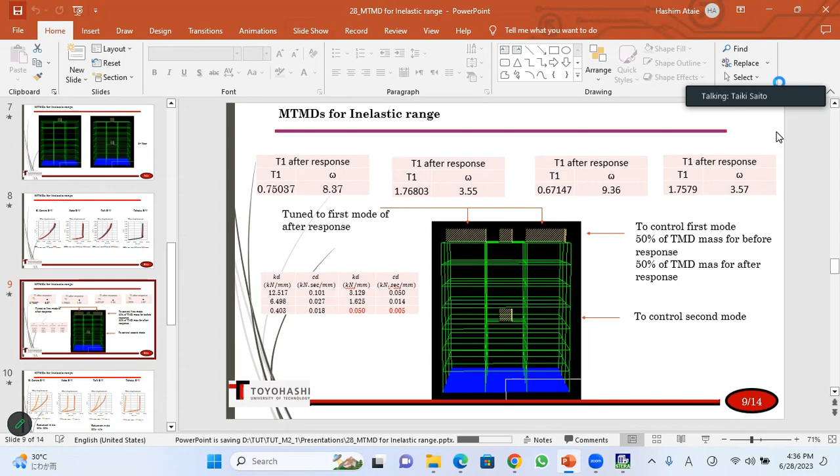Okay, so we cannot believe this without knowing the model is right. So okay, Sensei, please do the same thing for the new model. Okay, Sensei. Yeah. So it's okay. So is there anybody else, Sarayan-san, how about you?